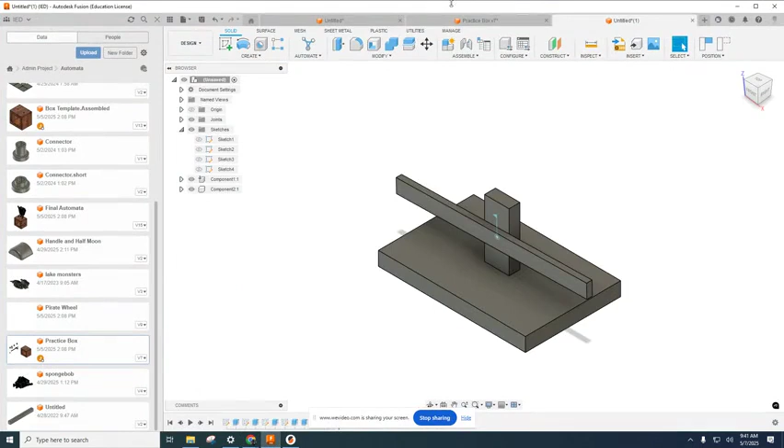A little cat. All right, so I'm going to make a sketch. I already picked out the image. I'm going to insert that image as a canvas.

Okay, so I'm going to choose this. We could choose whatever, but I'm going to choose this and click the surface. Now, sometimes it flips it around, so sometimes you have to decide which way you want it. I don't know, that's fine.

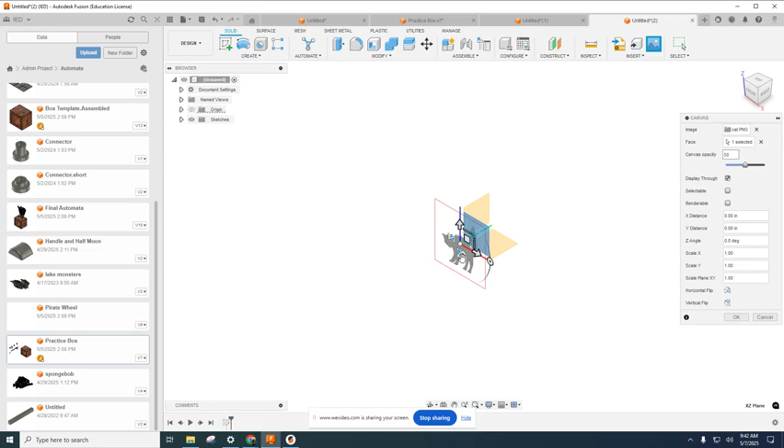All right, so then I'll make it a little bit bigger. Unfortunately, at this screen, it doesn't tell you the exact size. It tells you the scale, but it doesn't tell you the exact size.

So then once you do that, you can then make a sketch on this surface. See how this is now about a half inch by a half inch, so 1 inch wide and about 1 inch tall. So if that would work, then do that. If not, repeat that step, make it a little bit bigger.

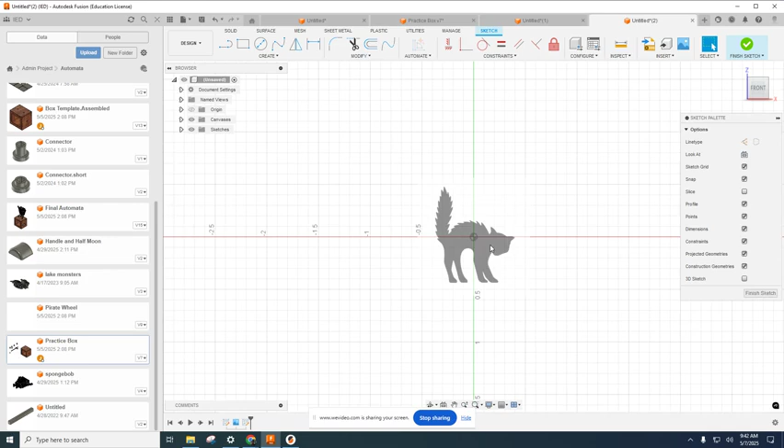All right, now I'm going to use the spline tool. I'm going to basically go around here and do an approximate outline. Does it have to be perfect? No, just like yours, you're doing an approximate outline so that you can have the general shape.

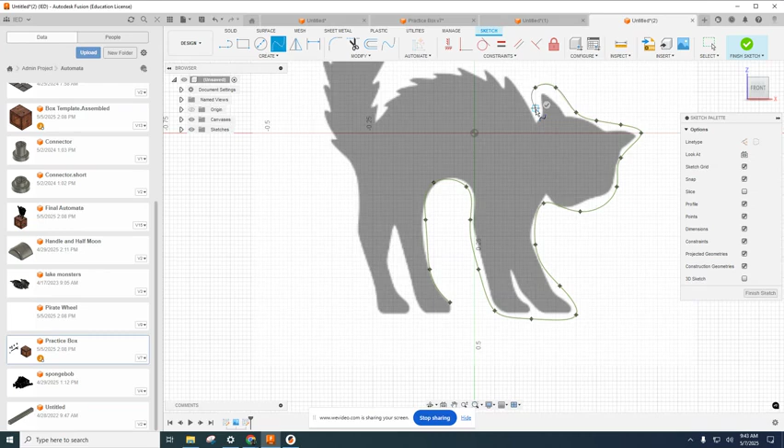Now you can go back and edit these nodes afterwards if you want, or it's okay if you're just kind of making it semi-close. Obviously your thing will probably be different than mine, and the more nodes you make, the more detailed it is, but it's not a huge requirement.

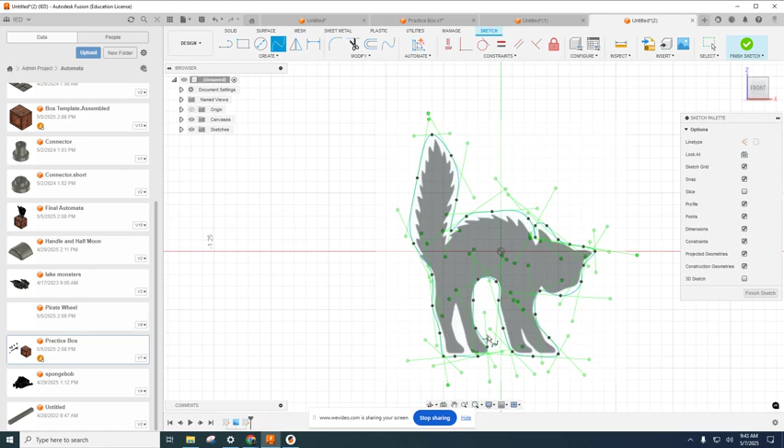All right, so do you see how they all popped up once they got connected? So now it is a closed shape. So I'm going to finish my sketch.

And now this, I'm going to act like this is a piece of MDF, which is 1/8, or it's okay to just put it in as 0.125. So I'm going to extrude this a distance of 0.125.

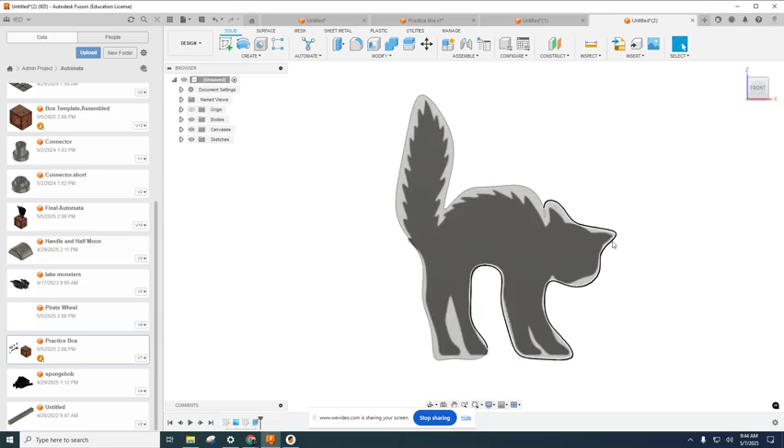All right, so now we have this. Wow, did I make it a distance of 0.125? Sure. All right, so basically we have this right here.

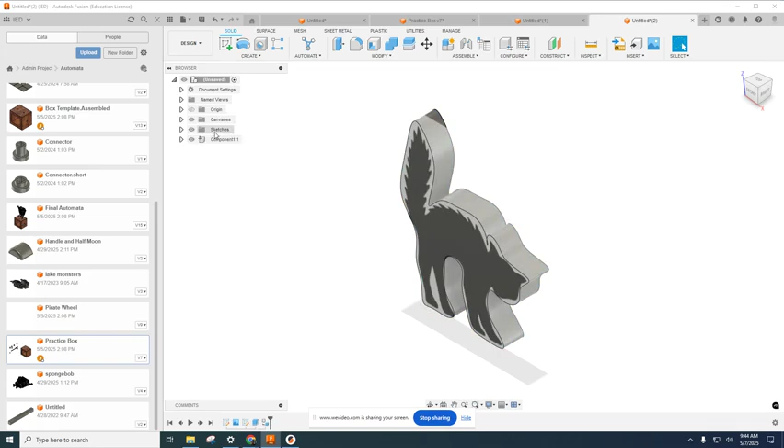And then we want to make this a component. Remember, body to component. We can unpin, we can make it look like this.

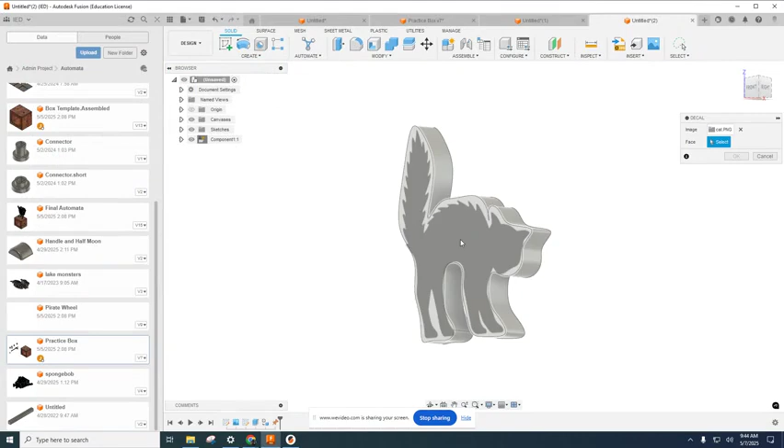And if we made the sketch on here, it should still show up. If you need to, sometimes it goes away and we might need to add a decal. You might need to go back here and click on that surface and add the decal. Again, that's dependent on yours.

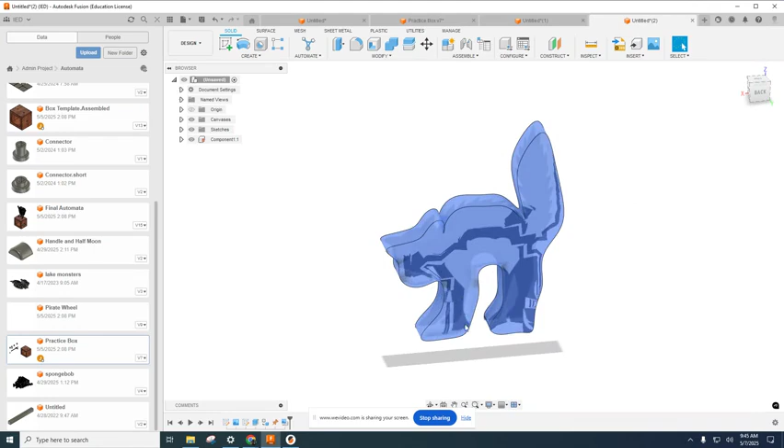You can add it, something like that. All right, so now we have a component that looks like that. I'm still going to unground. Now the problem is it's not super easy to attach this to the follower unless there's something to attach it to. So I'm going to go to the back of this and I'm going to make a...

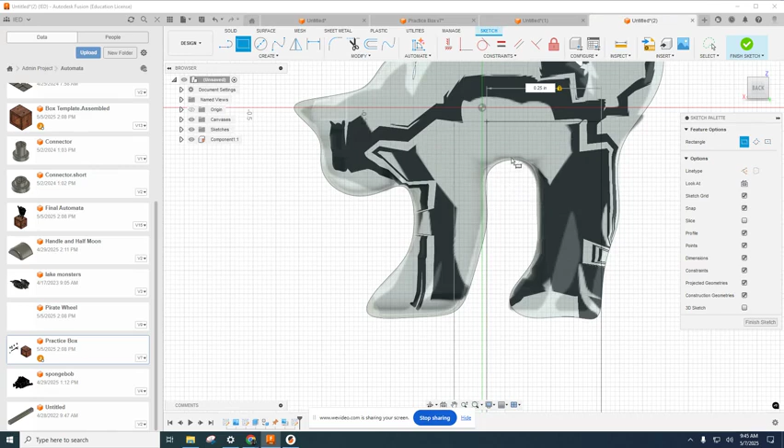Rectangle. So depending on the shape, you're going to decide on where, but that should be 0.25 wide, and then, as long as you want it to be. Okay, so that's good.

I'm going to move this over a little bit. Like I want it to be right here. So, and then I'm going to finish my sketch.

Now I'm going to extrude this in just a little bit. It doesn't have to be very much, but I'm going to extrude it in. So now I have some sort of shape that I can add to my follower.

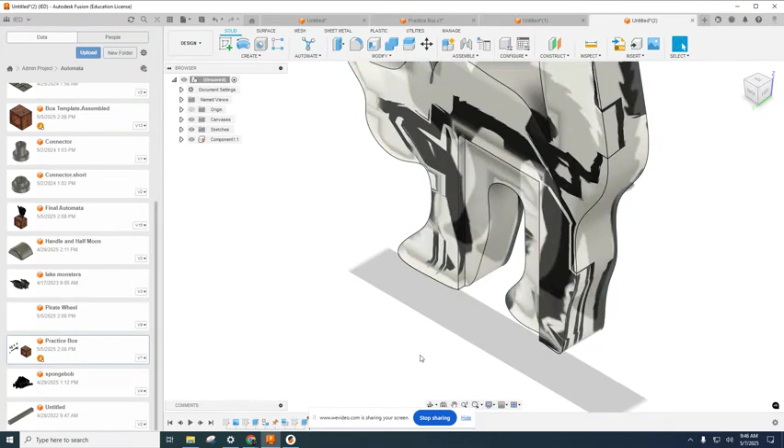All right, so now if, again, I go to the box template, I could go over here if I wanted to. So I can open up this one. So let's say I wanted to attach it to this.

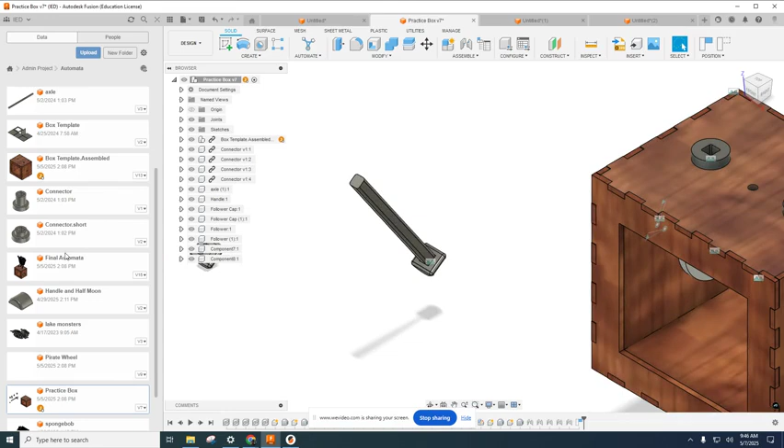So then basically I would bring in, I'm probably going to have to save it. Cat top. All right, and then I should be able to copy and paste it in there, or just grab it and bring it in. So I should just be able to drag it in.

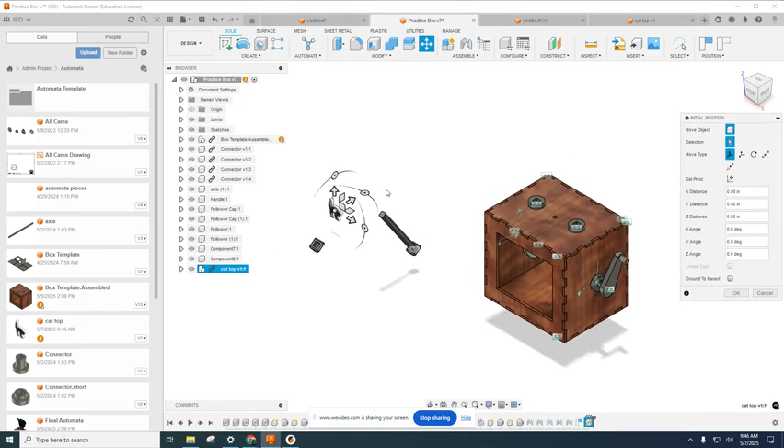Okay, now do you see how that's kind of tiny? All right, so it was about 1 inch by 1 inch, which again will work, but that's why it's important when you bring it in to decide what size.

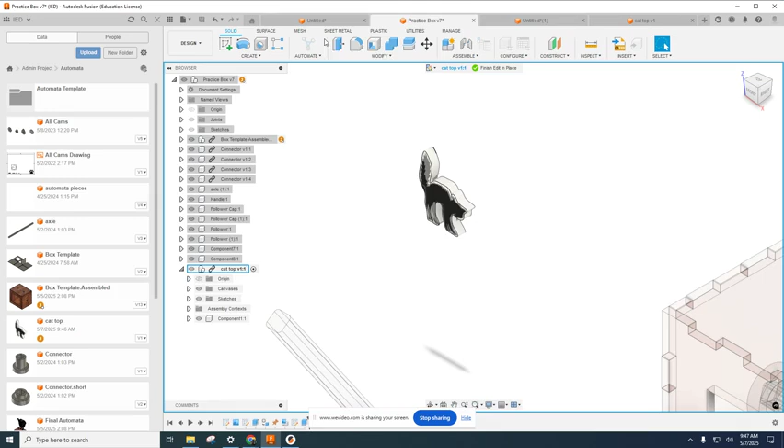Now, let's say I'm just unhappy with it and I want to make it bigger. We can click on this and edit in place. And we can go to scale, and we can make that a little bit bigger.

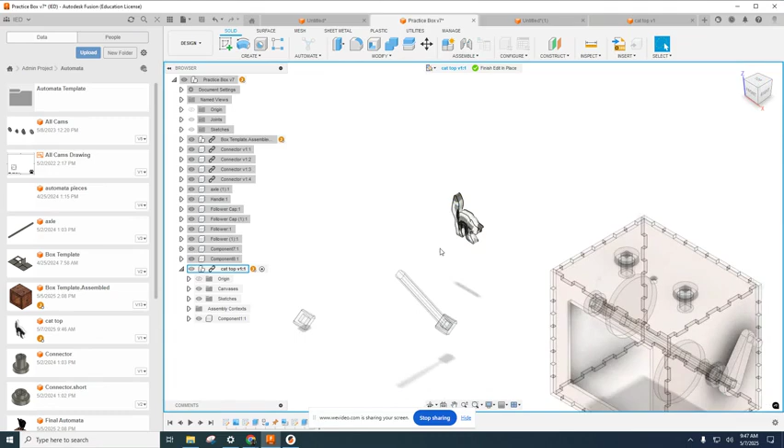The problem is the thing on the back won't be the same and the decal won't be the same, so it's much easier to do it on the front end. But basically now we have something that's an okay size. And we will finish edit in place.

Now we want to attach this to this, right? So I am going to hit J for joint, and I am going to hit the edge, this surface. All right, so I'm going to go in on this surface and click that.

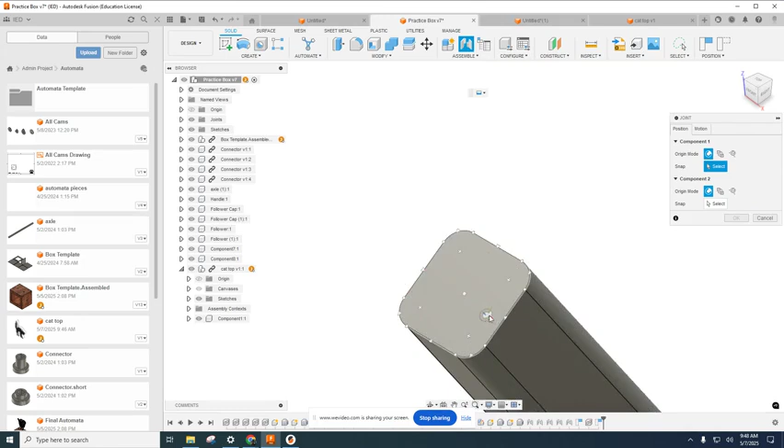And then I'm going to go to the back of this and go up to the back surface in here and hit that. Let's see if this works.

No, all right, so we have to be a little bit more careful there. I don't think I hit that surface. So, J, I want to hit this surface and do that.

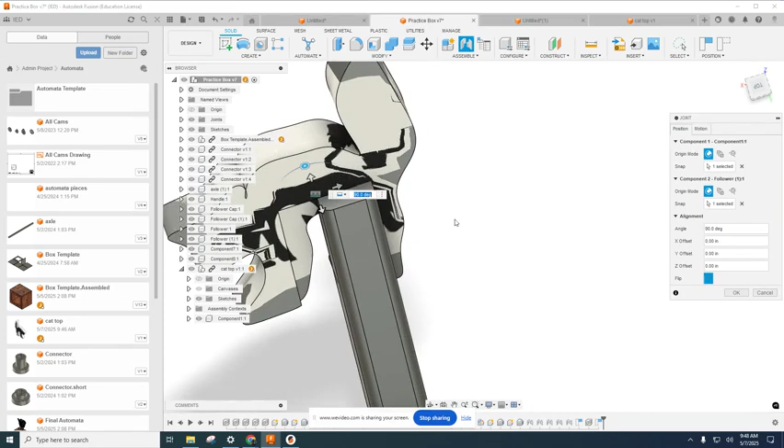And I'm going to go back to this one and go in, paying attention to this orientation. And then I'm going to go in and attach it to this surface. So we can move it, we can adjust it a little bit like that, you know, find the right spot. But then you now have this attached to this.

All right, we left this behind. All right, so that is how you would attach something to that. All right, then once it's in there, it's attached.